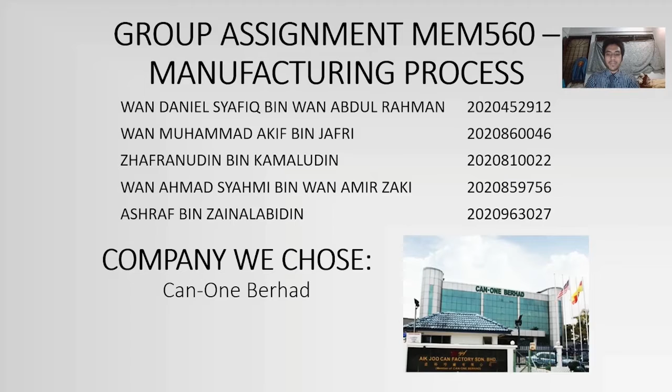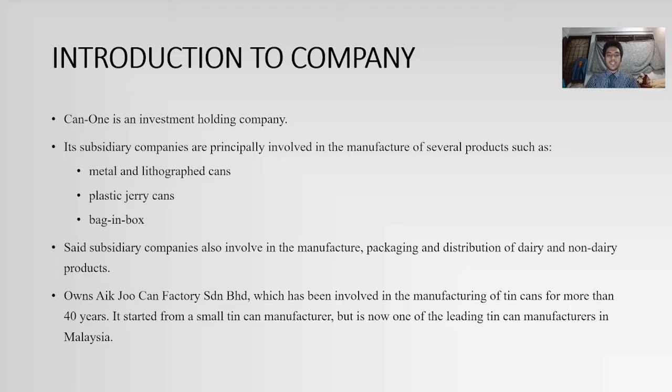The company we chose is Can-One Berhad. So what is Can-One Berhad? Can-One is an investment holding company. Its subsidiary companies are principally involved in the manufacture of several products such as metal and lithograph cans, plastic jerry cans, and bag-in-box. These subsidiary companies are also involved in the manufacture, packaging, and distribution of dairy and non-dairy products. The company also owns Aik Joo Can Factory Sendirian Berhad, which has been involved in manufacturing tin cans for more than 40 years. It started as a small tin can manufacturer but is now one of the leading tin can manufacturers in Malaysia.

So the background of the company: Can-One was founded on 7 January 2004. Can-One Berhad was listed on the main board of Bursa Malaysia Securities Berhad on 29 July 2005. Can-One Group ventured into the manufacture of plastic jerry cans via Aik Joo and Canzo Sendirian Berhad, another wholly owned subsidiary company. The company started with 2 jerrycan lines in 2003 and has since expanded to 50 jerrycan lines as of the current date. In order to meet customers' demands for substitute packaging products, the group introduced bag-in-box in 2008, widening its range of packaging products.

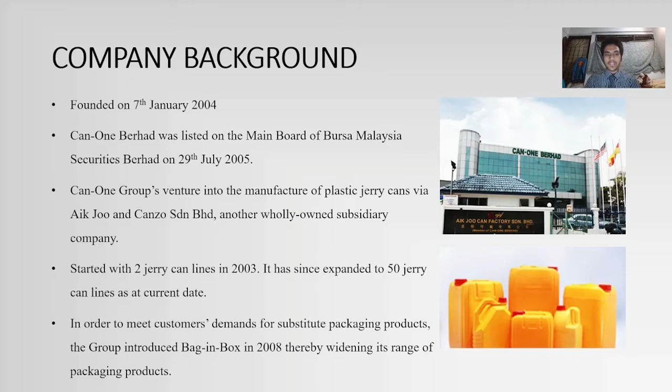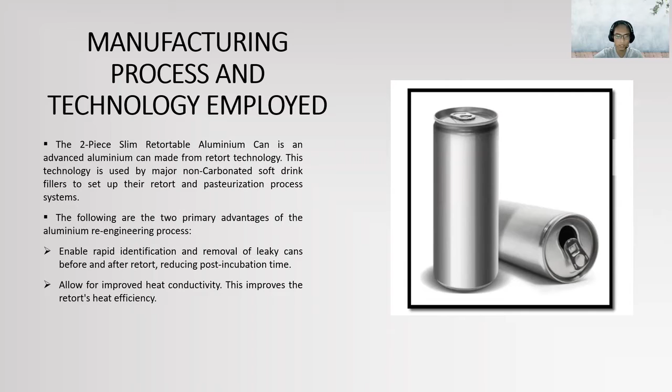The two-piece slim retortable aluminum can is an advanced aluminum can made with retort technology. This technology is used by major non-carbonated soft drink fillers to set up their retort and pasteurization process systems. The two primary advantages of this aluminum re-engineering process are: first, it enables rapid identification and removal of leaky cans before and after retort, reducing post-incubation time; second, it allows for improved heat conductivity, which improves retort heat efficiency.

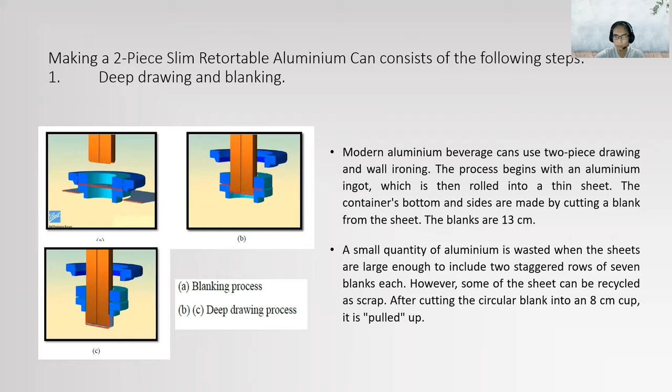Making a two-piece slim retortable aluminum can consists of the following steps. First, deep drawing and blanking. Modern aluminum beverage cans use two-piece drawing and wall ironing. The process begins with an aluminum ingot which is rolled into a thin sheet. The container bottom and side are made by cutting a blank from the sheet. The blank is 13 cm. A small quantity of aluminum is wasted when the sheets are large enough to include two staggered rows of 7 blanks each; however, some of the sheet can be recycled as scrap. After cutting the circular blank into an 8 cm cup, it is pulled up.

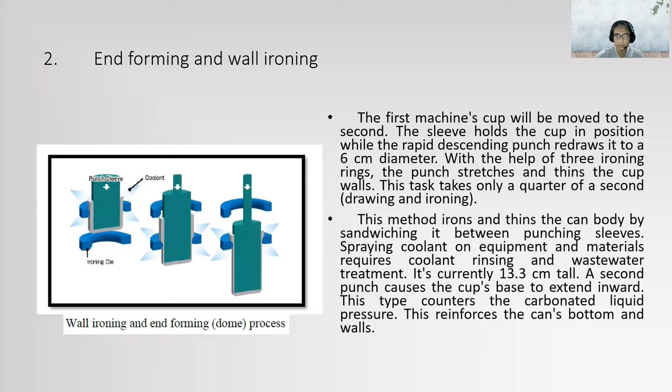Second, end forming and wall ironing. The first machined cup is moved to the second stage. The sleeve holds the cup in position while the rapid descending punch redraws it to a 6 cm diameter. With the help of 3 ironing rings, the punch stretches and thins the cup walls; this step takes only a quarter of a second. This method irons and thins the can body by sandwiching it between punching sleeves. Spraying coolant on equipment and materials requires coolant rinsing and wastewater treatment. It's currently 13.3 cm tall. The second punch causes the cup base to extend inward; this counters the carbonated liquid pressure and reinforces the can's bottom and wall.

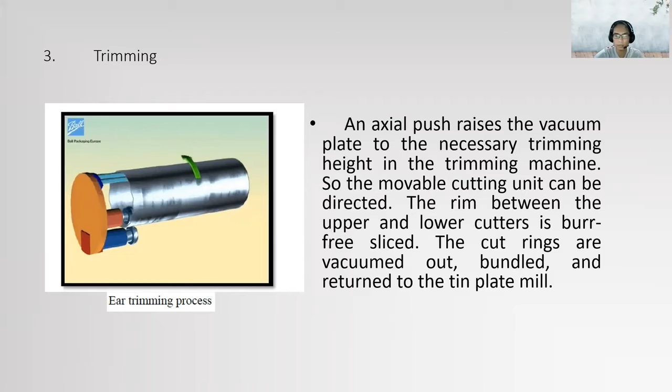Fourth, pot cleaning and decorating. Drawing and ironing leave the can's outside smooth and lustrous, reducing the need to polish. The can is then washed and imprinted with the name. In order to form the can's neck, the top flange is folded over after squeezing it slightly.

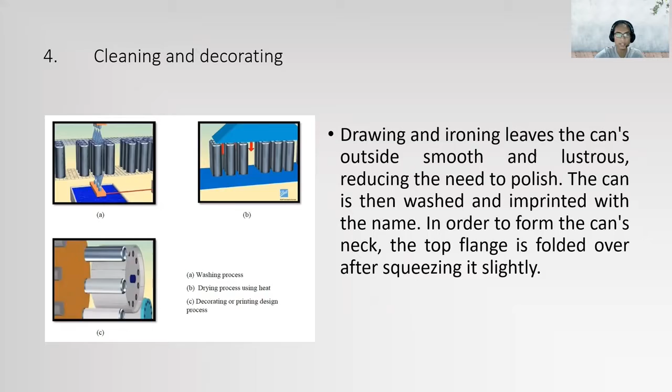Fifth, necker flanger. The necker reduces the top of the can's diameter. The thicker top of the can with the pull top costs extra. The flanger uses the flange to attach the lid or end. A reformer strengthens a light dome by grooving it deeply.

This stage is used for beverage cans before pasteurization. The profile technique saves material and allows the can to be stored on a shelf or in the fridge. This strengthens the can.

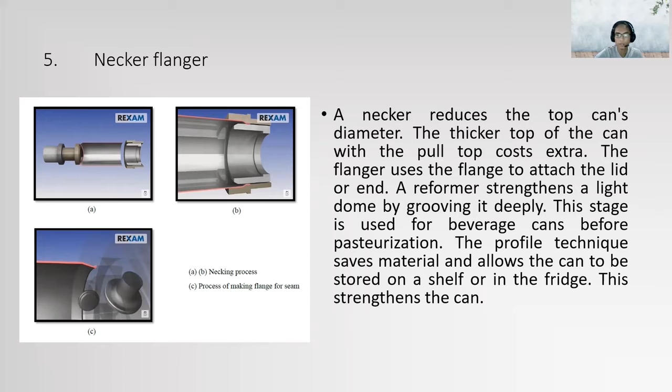6. The lid. Unlike the base and sides of the container, the lid is made of an aluminum alloy. In contrast, the flat lid is constructed of aluminum with more magnesium and less manganese than the base. The result is a thicker lid and stronger metal.

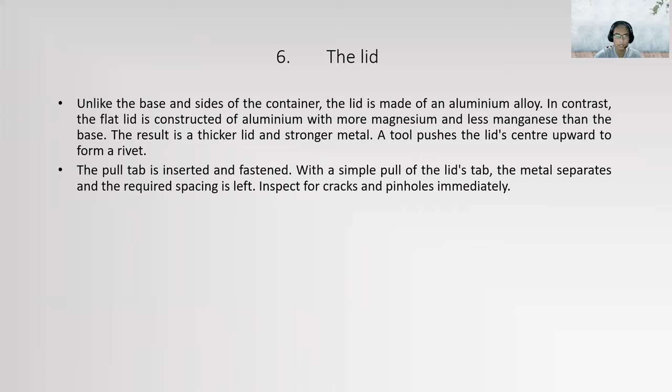A tool pushes the lid center upward to form a rivet. The pull tab is inserted and fastened with a simple pull of the lid tab. The metal separates and the required spacing is left. Inspect for crack and pinhole immediately.

7. Quality inspection. The examination should be based on the agreed upon AQL, acceptance quality level. They offer comprehensive quality assurance service. At each level of the production line, a KJCF quality representative inspects the product. Here is the process inspection flow.

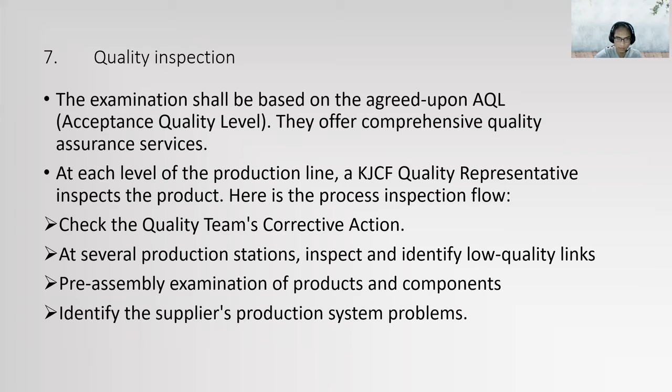First, check the quality team corrective action. Second, at several production stations, inspect and identify low quality links. Third, pre-assembly examination of product and components. Fourth, identify the supplier's production system problem.

Lastly, filling and seaming. The neck is shaped here. A filling machine pushes the liquid into the can. The lid was shut. The top flange of the can is curved and sealed, and the can is now for sale.

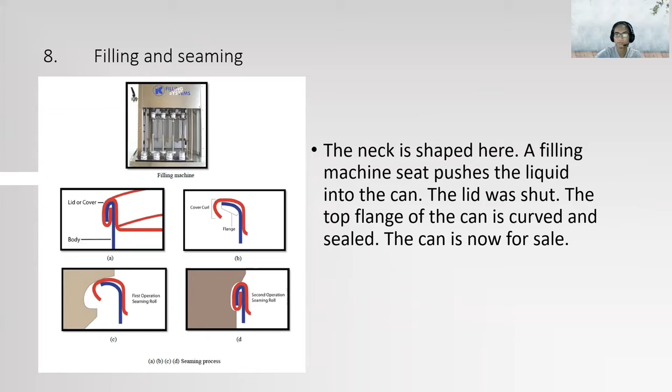And today I would like to present about design concept and quality assurance.

So each year, about 500 billion aluminium beverage cans are manufactured and distributed internationally, and almost all of them share a common fundamental design. It is divided into three shapes, which is first spherical, second cuboid, and the third one is cylinder. And the cylinder is the most often used can shape.

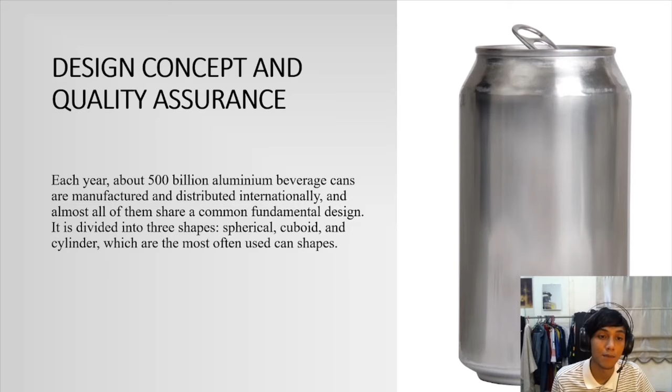So what are the company goals on the design concept? First, reducing the material waste. Given the volume of cans produced each year, each bit of optimization has significant economic and material benefit. Making portions of cans a few millimeters thinner can result in hundreds of thousands of pounds of metal being saved annually.

Second, meet the consumer expectation. Ascertain that our packaging options meet the expectation of consumers for a truly exceptional product, namely freshness and simplicity and health.

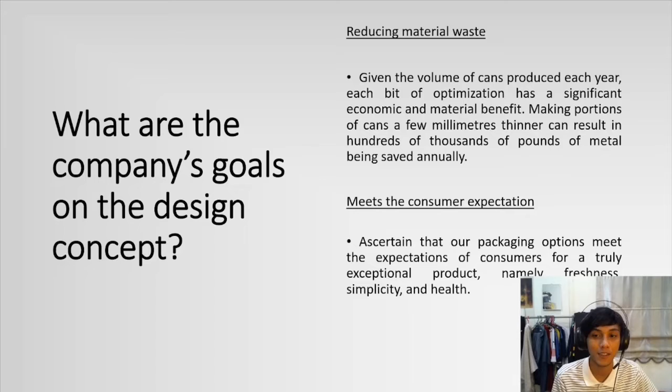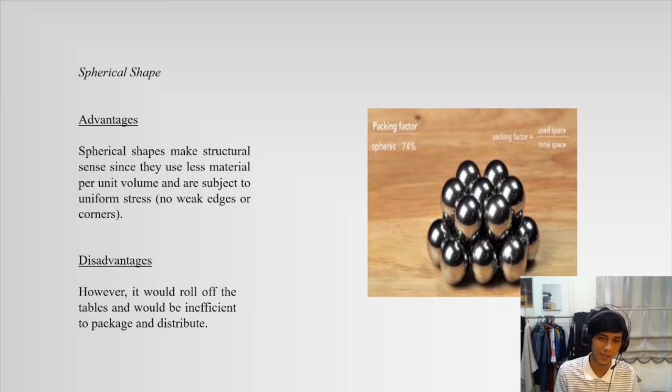So the first shape is the spherical shape. The advantage is spherical shapes make structural sense since they use less material per unit volume and are subject to uniform stress. It is because you have no weak edges or corners. And the disadvantage, however, is it will roll off the tables and will be inefficient to package and distribute.

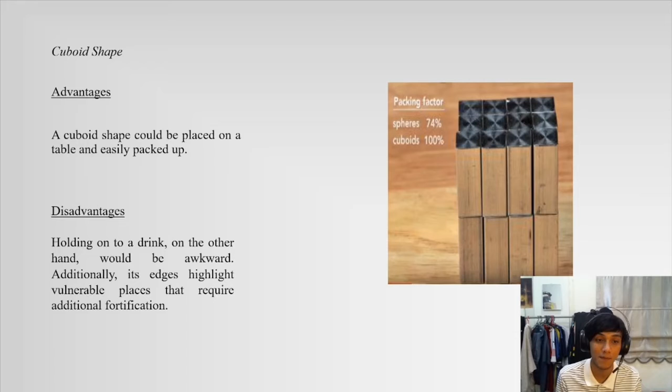So for the cuboid shape, the advantage is a cuboid shape could be placed on a table easily and packed up. The disadvantage, when we hold it to drink, on the other hand, it will look awkward. Additionally, its edges highlight vulnerable places that require additional fortification.

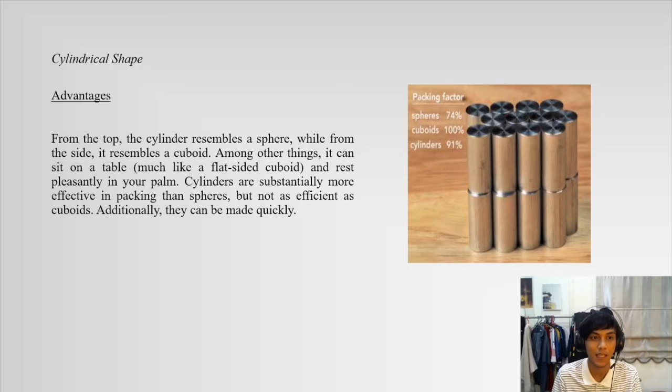So lastly, the most popular shape is a cylinder, and the advantage, the cylinder resembles a sphere from the top, while from the side it resembles a cuboid. Among other things, it can sit on a table much like a flat side cuboid and rest pleasantly in your palm. Cylinders are substantially more effective in packing than spheres, but not as efficient as cuboids. Additionally, they can be made quickly.

So, how to make a cylinder can? First, to produce a can, a flat metal blank is forced through a die, resulting in the formation of a cup. The technique is continued until the desired height, form and thickness are achieved.

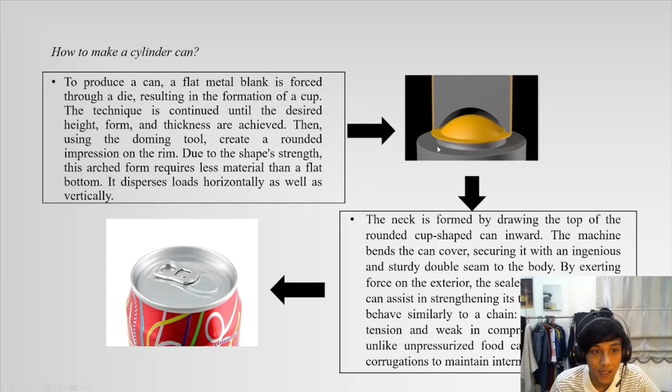Then, using the doming tool, create a rounded impression on the rim due to the shape strength. This requires less material than a flat bottom. It disperses loads horizontally as well as vertically. So the picture on the right side is how it was made.

And the next one is the neck, which is formed by drawing the top of the rounded cup shape can inward. The machine bends the can cover, securing it with an ingenious and sturdy double seam to the body.

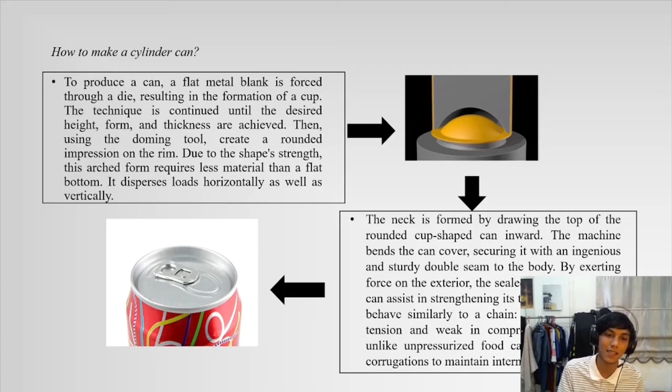By exerting force on the exterior, the sealed internal pressure can assist in strengthening its thin sides. The side behaves similarly to a chain. They are strong in tension and weak in compression.

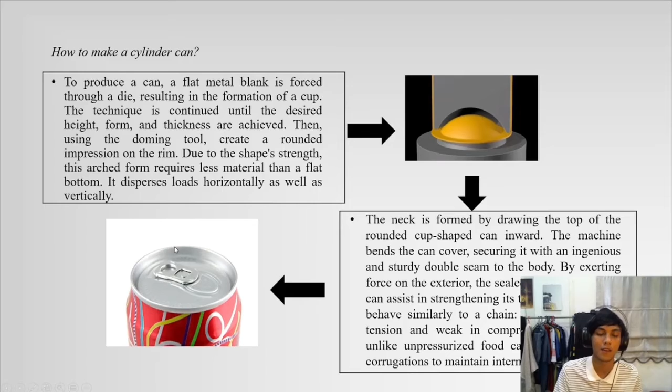Soda cans, unlike unpressurized food cans, do not require corrugation to maintain internal pressure. So this is the neck, how we form the neck of a can. And lastly, for the tab can, for drinking and venting, the original flat top can had no tab and two apertures. Pull tabs were a good start. Despite this, they littered the street and were frequently ingested by children.

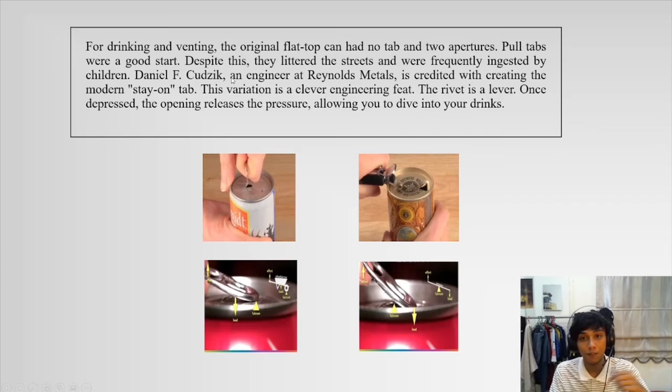So to create it, this variation is a clever engineering feat. The rivet is a lever. Once depressed, it opens the tab, allowing you to dive into your drinks. Just open and drink your drinks.

So for the discussion on the design concept and quality assurance, their cutting-edge technology has improved the quality of their goods and services. This mix of human and technical resources makes them one of Malaysia's most established firms. Second, they believe that regulating and running processes that affect performance can make significant impacts. Continual human growth and solid financial support will help them accomplish their quality goals.

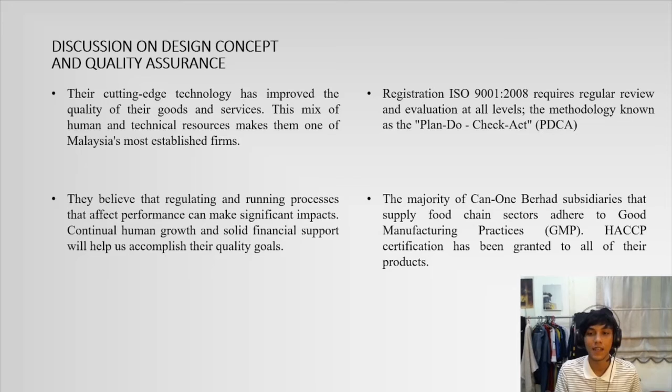Their registration to ISO 9001:2008 requires regular review and evaluation at all levels. And lastly, the majority of Can-One Berhad, the company name, the subsidiaries that supply food chain sectors adhere to good manufacturing practices (GMP), and HACCP certification has been granted to all of their products.

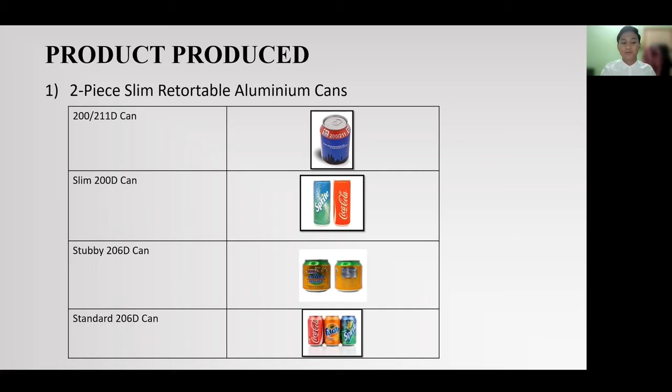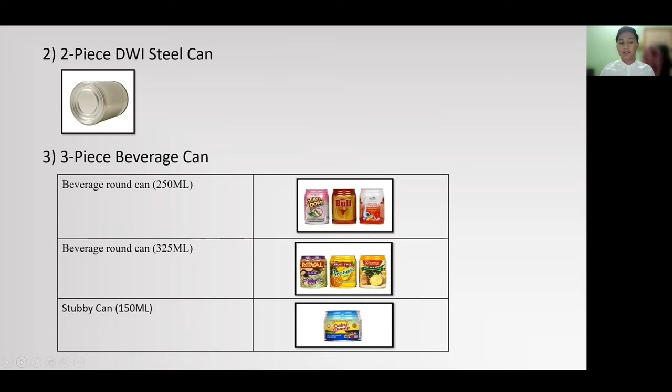Next, we move to the two-piece DWI steel can with item capacity 500 grams. And the third one is the three-piece beverage can. The first is the beverage round can with 250 ml. And the next one is the beverage round can with 325 ml item capacity. And the last one is the stubby can with item capacity 150 ml. That's all for the products produced.

Then we move to the problems faced. The first one is laminated plate. This is known as a defect where the metal body or end plate is separated into two layers of metal which are not bonded. It can also be defined as a thin and flat surface separation present inside the metal plate. It usually occurs during the rolling process.

Lamination formation is mainly caused by the presence of discontinuities in the metal, such as porosity trapped in the slab. The defect can occur within the body of the plate, and the defect will also affect the strength in the thickness direction.

The next problem faced is wrinkles. It actually occurs in the beverage can at the early stage during the deep drawing operation. It is also known as wrinkling of sheet metal material, usually in the wall or flange of the part. During the stamping process, radial drawing stress and compressive stress are applied to the flange of the blank, resulting in wrinkles. One of the causes affecting the wrinkle defect is the die temperature and metal alloy during the drawing process.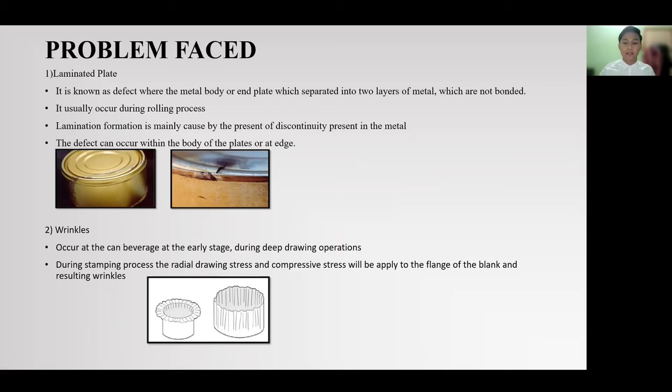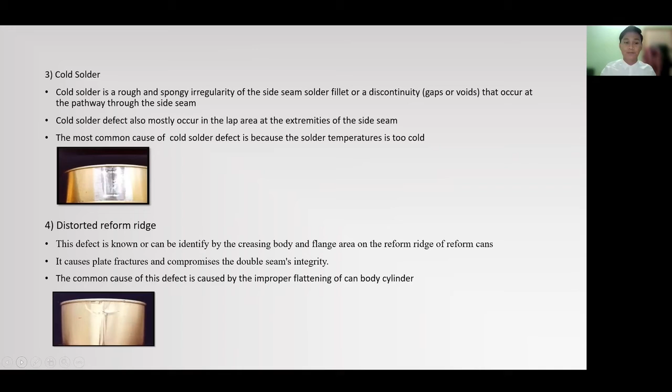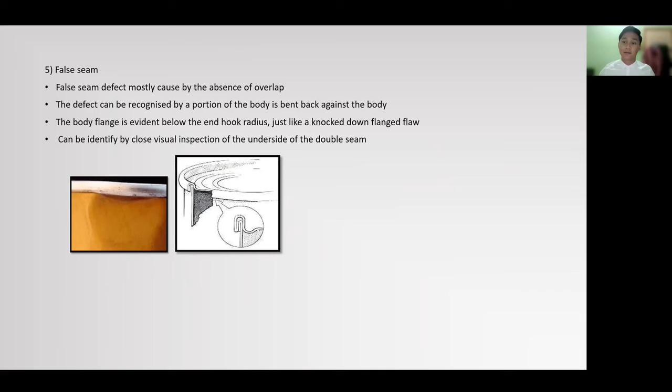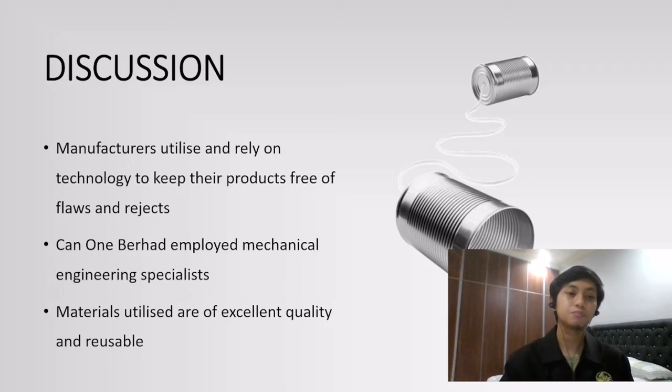This product manufactured by Can One Berhad is specialized in mechanical engineering. Therefore, they employ mechanical engineering specialists to assist them in the production of the product. The majority of materials utilized are of excellent quality, such as aluminium, and also reusable, such as plastic covers. Every day, workers in this company are dealing with machines. Therefore, safety values are extremely emphasized at every step and inch in this company.

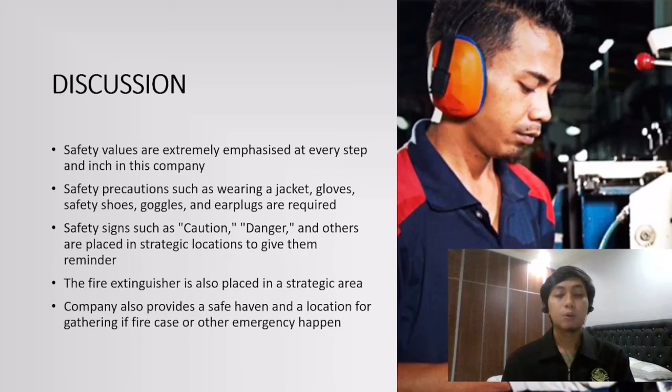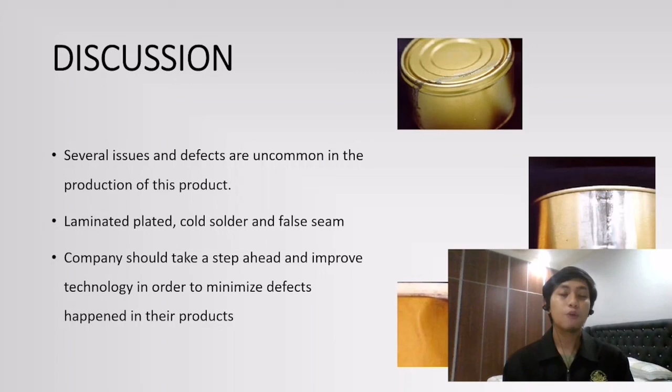Several issues and defects are uncommon in the production of this product, but unfortunately they happen. Laminated plate, cold solder, and false seam are examples of the defects that the company faces in the production of the product. Therefore, this company, Can One Berhad, should take a step ahead and improve technology in order to minimize the defects in their product. The best way to keep the customer satisfied and happy is to always maintain the quality of the product and also improve in the future.